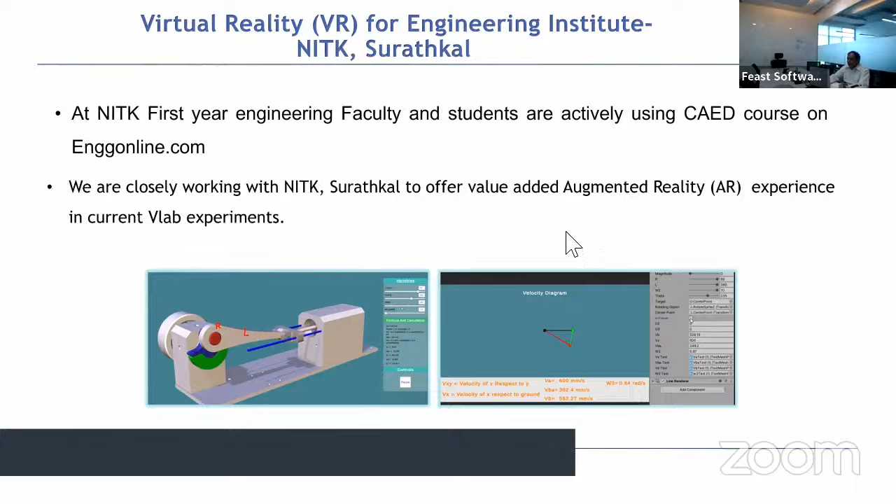So we are working across almost all streams. I can show you applications in mechanical, electrical, welding - welding being one of the offshoots of workshop technology. So from a technological point of view, no stream is a constraint to creating this content.

And we will see what type of content can be created here - like inside a workshop scenario with different tools: lathe machine, grinding operation, fitter operation, 6-cylinder engine assembly and disassembly. Even in mechatronics, complicated processes can be simplified and shown along with the instruments used in our physical lab. Here is an example of scaffolding that has been used. There is no limit to what we can show, but it needs to be optimized and created into VR.

And in industry, I am going to cover the practical installations where it is being done. Like say for example, AFCONS, this is Shapoorji Pallonji Group. So they have installed this for training of their supervisors and workers.

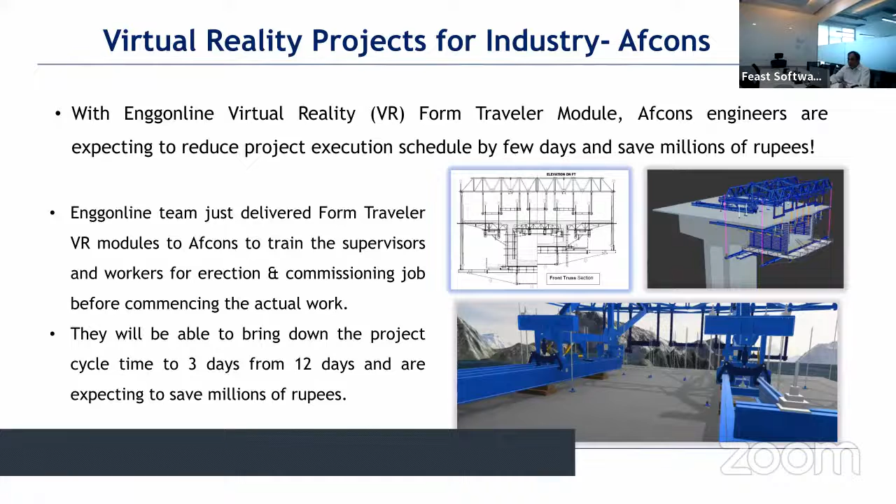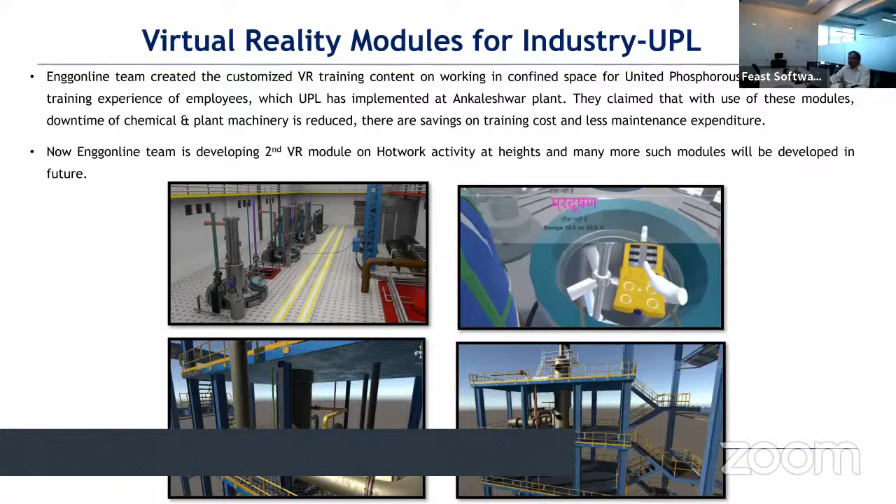And they have benefited a lot from this. Then United Phosphorus, which is one of the biggest agrochemical companies, having 40 plants worldwide, so they have also implemented a few training models in reality. So after showing the academic part in a lab, how industry is going to use it, that I will also demonstrate. But this is, I'm just listing.

For L&T also, we have done a lot of work, and even for L&T's training academy at Madh Island here in Mumbai, whereby all GPs and trainers from various vocational institutes are being trained. So they are using a combination of our engineering online courses, some AR/VR technology, followed by the practicals and the final assessment.

All right, so now I will just stop sharing this screen and try to show you the live demonstration over here. If till this point any of you have any queries or doubts, you can raise a hand or ask me, or otherwise I will continue to the demonstration.

Okay, so I will continue with the demonstration. So I'm going to wear this headset, and whatever I will be seeing, I'm going to share on the screen, which you all will be able to see—myself also what I am doing, and from the other camera what is being seen on the screen. So let me share that.

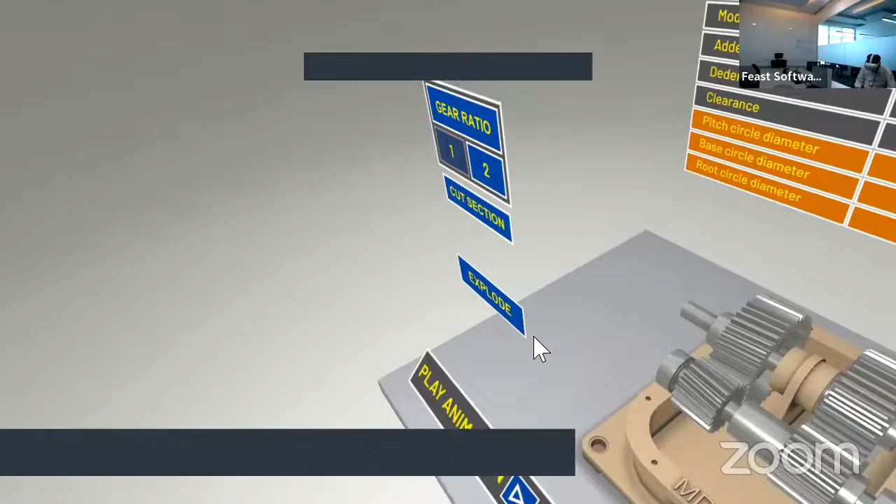Say for example, here I can see the gearbox in front of me with some parameters, and I can play this gearbox animation. Animation means I can just see how this gearbox will be working at different speeds. It may be 1x, 2x, 3x, or 4x.

Now, from the learning aspect, we have included a few parameters, and many other parameters can also be customized and added over here. So I can change the gear ratio. As soon as I change the gear ratio, the length or the size of the gears are changing, and also the related parameters which are being changed. So this can be used from the application point of view also.

And from the design aspect also, certain key design aspects which may be difficult to explain to the students—so those can also be included as a table over here.

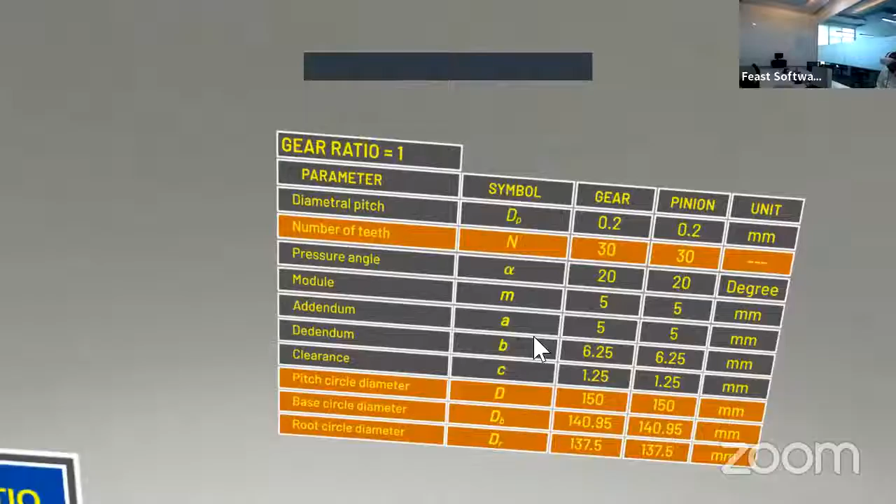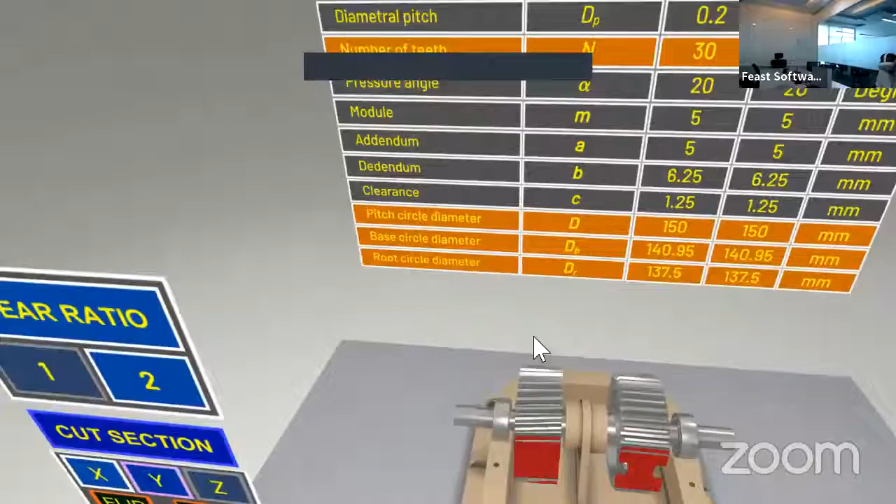Then cut section. So most of the time for first year engineering students, cut sections may be a challenge for them. So in the XYZ axis, I can just add or reduce the cut section and have a look. So this is one of the, what I can say, best applications to see the cut section.

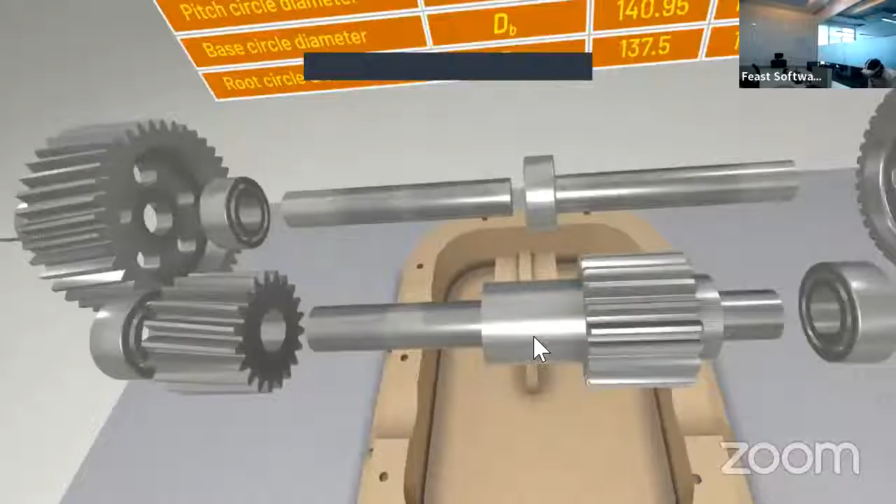We can explode this also. So I can see different parts over here. I can move into any part here, okay, and I can see the inside component. I can assemble it just by clicking on a button.

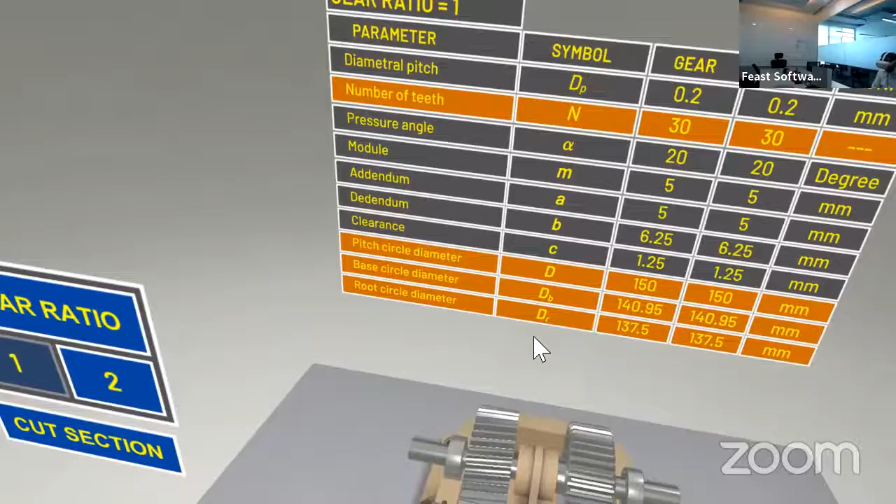So here, whatever the different components are there, I can explain. I can see the cut section. I can even see the nomenclature also with the formulae if required for design aspect—what are the major formulae which are required for design of the gearbox.

Then I can change here some part of gamification whereby there is a spur gear and helical gear. So I can just pick up the component and I can place it. Whether I am placing it correctly or not, that is the gamification part. So this is not correct.

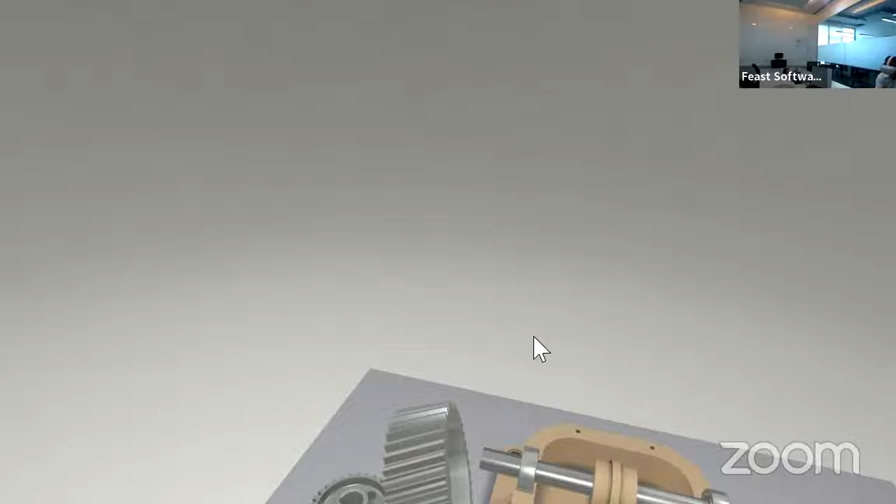Try again. So I have to lift the helical gear and place it in front of the small helical gear. I have to lift the spur gear and place it in front of the spur gear. Then it is correct. So this is a small gamification part.

So like this, we can customize all the models. Let me try another demonstration—let's say for welding.

Sharing the screen. Yes.

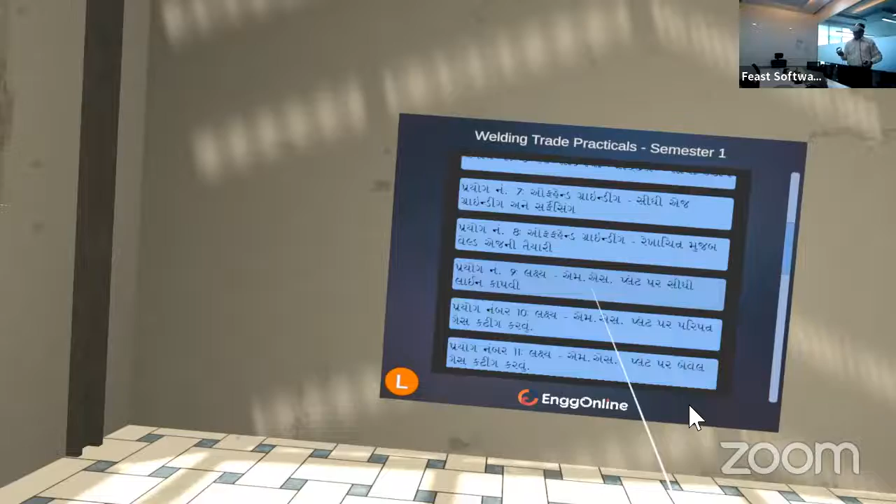This is a workshop setup for welding, and this welding experience can be available in multiple languages, any vernacular language. Right now we have it created in Gujarati and English.

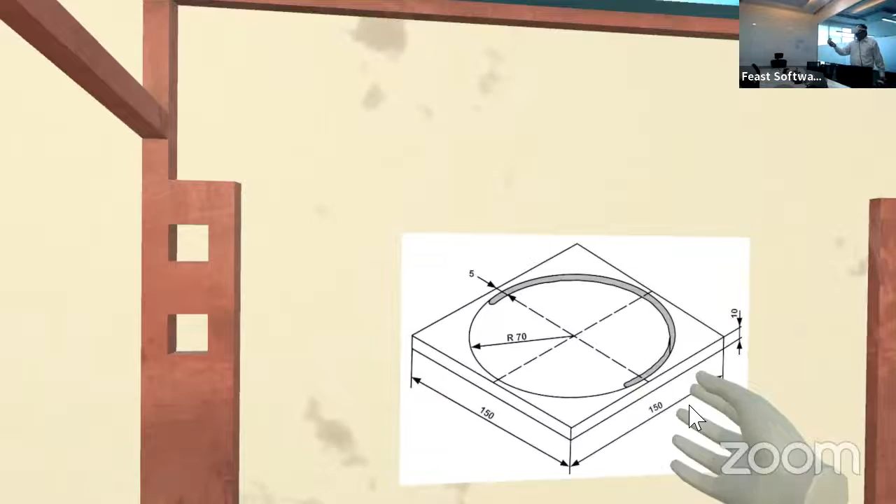Keep raw material ready as per the given drawing and dimensions. This is a totally guided experiment whereby initially the faculty explain in the classroom what I am showing with the help of this lens and projecting it on a projector. Any student can also participate, assume me as a student while the expert or faculty explain the concept and I do it step by step. We are showing the drawing also over here for that experiment, because drawing reading is majorly a difficult part for most engineering students, especially in the first year.

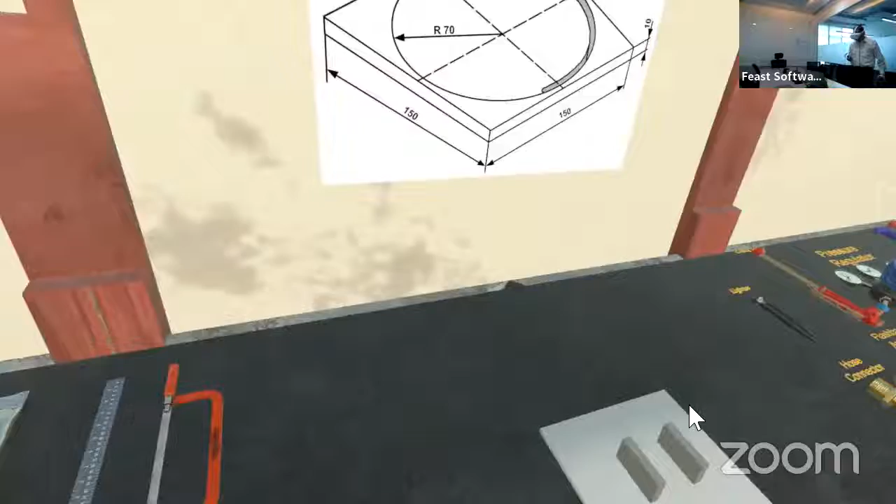Step number 2 is to keep the raw material ready, so I am using these different tools. I can interact with any of these tools, like I can pick them up. The controls are very simple, I am seeing these two controllers as my palms. I can press the middle button and see these palms getting into a fist, and that's how I can pick up any particular component in my hand, and as long as I press this button, that object stays in my hand.

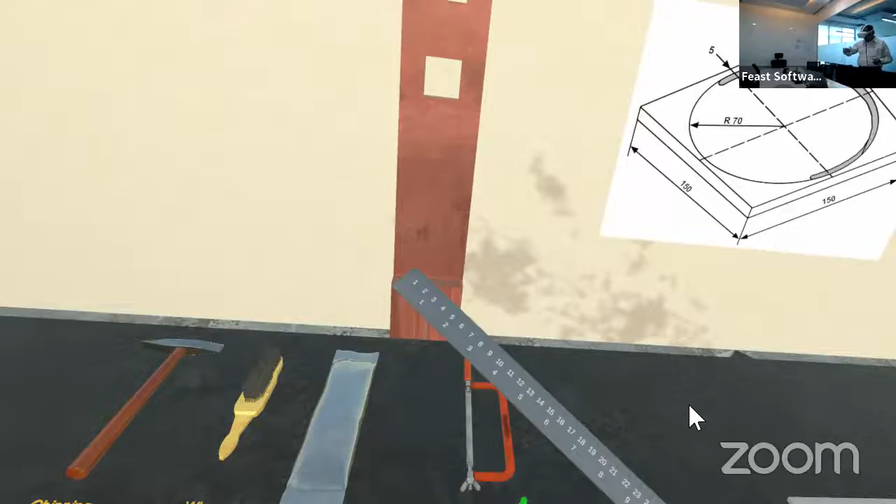As per the drawing, the first step is to draw a circle with radius 70, and the dimensions are given, like 150mm by 10mm. There is a foot scale also available, and all the dimensions will be as per the real world. Even if I try to measure the dimensions, it will be almost the same as physically.

Keep the job on the cutting table in a flat position. I have to keep the job in a flat position on the cutting table, clean the job surface with a wire brush, and remove burrs by filing. So now I have to clean the job surface.

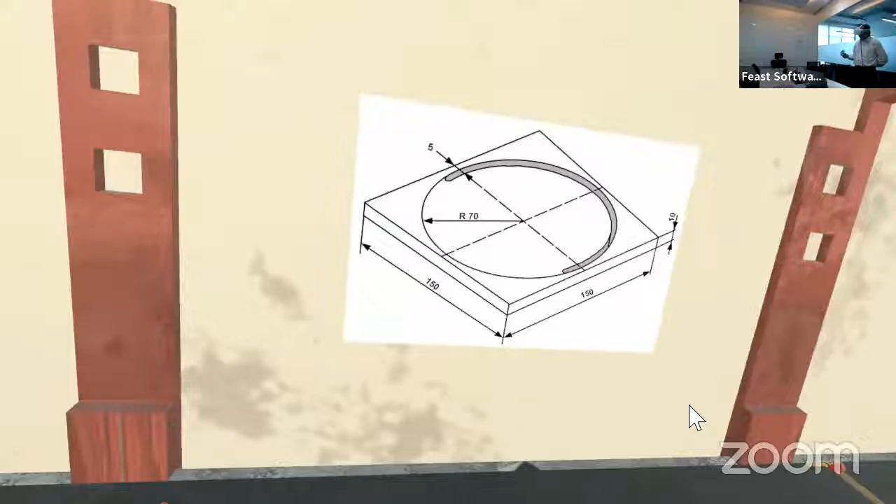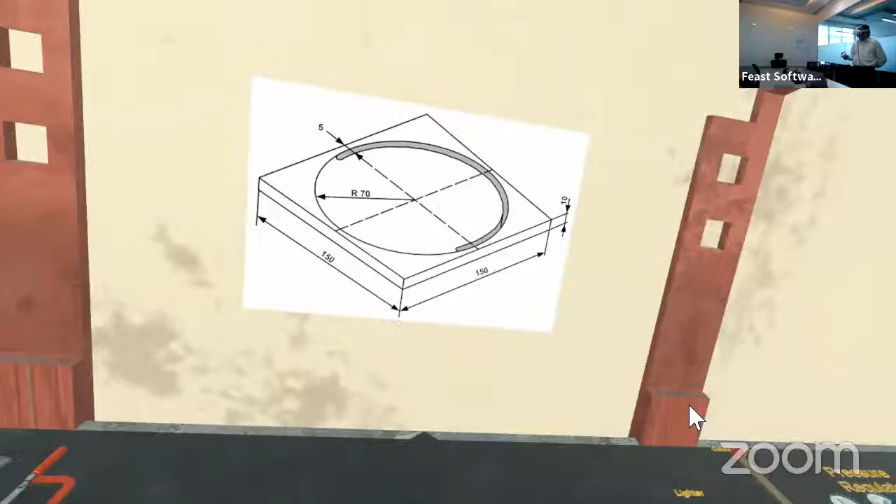If I don't clean the job surface and try to do other activities like welding or cutting, what are the disadvantages? That needs to be explained by the faculty or the expert. Most of the time in our workshop, we have this setup ready, like the gas cylinders and different accessories, and we tell students to do the end activity, different types of welding or cutting, but we don't give them a chance in reality to do this setup physically. That's the gap - when they go into industry, they might not be aware about the different setups or the basics they were supposed to learn in lab activity.

So this is for welding, but it may be applicable to any other practical.

As per the drawing, the surfaces of the job should be marked and punched. So the next step is to mark the job with the help of a center punch and hammer. Whatever position I see in fluorescent green color is the guiding position, so I have to put my center punch aligning to that position and hammer it. But if I try to hammer it just by touching it, I get a sound, but the impression is not marked on the job. Why? Because we are trying to get the feeling or forces which we may apply in reality - unless I hit it with the right force, it will not get punched.

So I have to perform the action, even though I am not holding these tools practically, but I feel like I am having this hammer and applying the force necessary in a real condition.

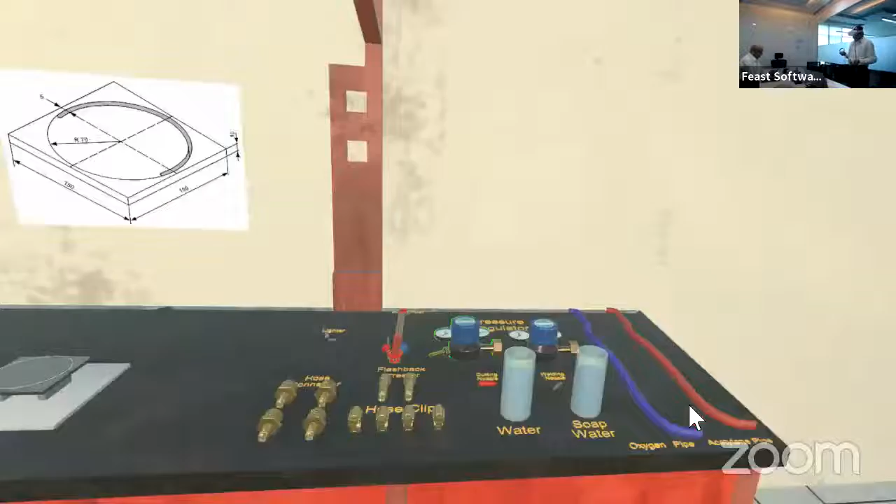Fix regulators on both the cylinders. Fit the regulator - for the right-handed thread run clockwise, and for the left-handed thread run counterclockwise. So the different nuances here: one type of regulator, like on oxygen or acetylene, has clockwise thread, the other has anti-clockwise thread, and we have to know how to fit it correctly. This is something students may not be aware of if they don't do it themselves, so certain parts can be done virtually.

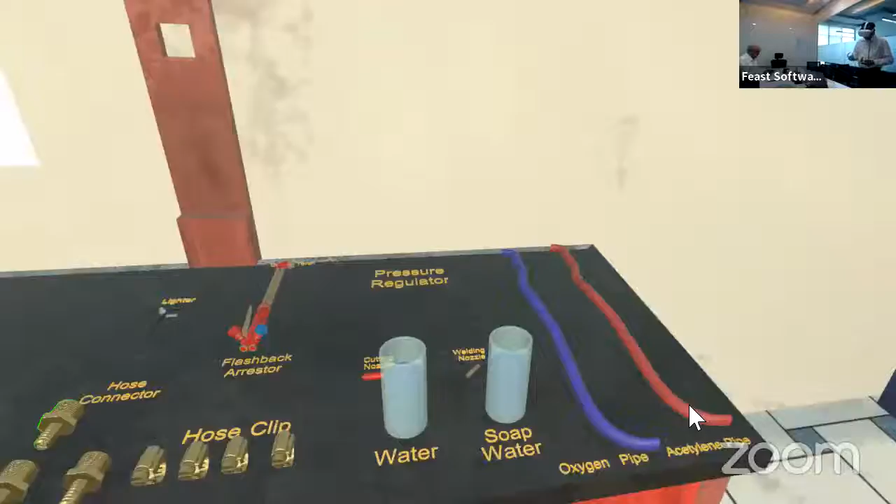Fix flashback arrestor and hose connector on both the regulators. Setting up cylinders may be a hazardous activity in real life, so this practical is done in workshop. Things which are really needed, like welding and cutting angle, can be done practically also after practicing in VR.

The next step is fixing the hose. These are the hose pipes having different colors, so I can attach it to the regulator.

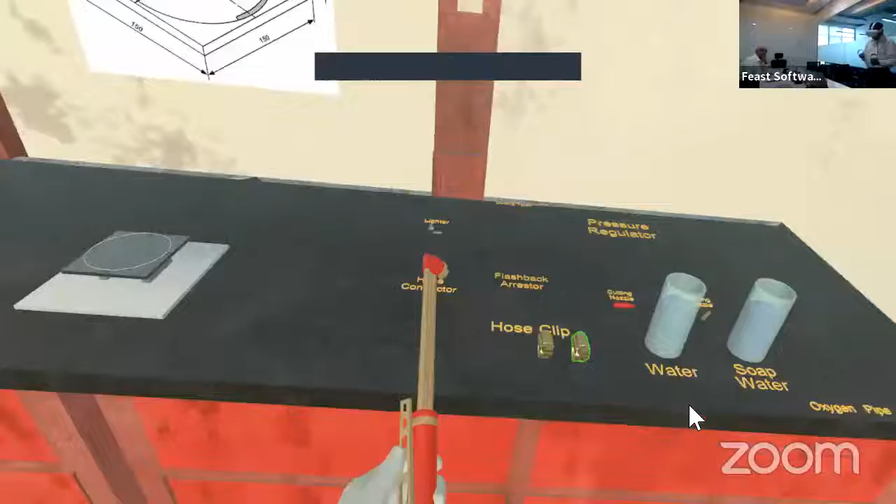Fix hose clip to avoid leakage of gas at regulators. To prevent leakage, I have to put the hose clips on both pipes. For the hose connector, fix hose pipe and hose clip - now this is on a welding torch or gas cutting torch, and I have attached the hose connector so I can attach the hose over here. Again, to prevent leakage, I fix the hose pipe on both regulators.

Now I can set up the gas pressure. I can see the readings on the knob. Through this zoom call you may not be able to see it clearly, but once you near the lens, you'll be able to see all the readings there.

Now we have to check the leakage also, and there are two aspects - one is the oxygen cylinder, one is the acetylene cylinder. For acetylene, we have to check it with soap water - whether normal water or soap water. If any bubbles appear, then our settings are not okay, they're incorrect. If bubbles are not there, then this is perfect.

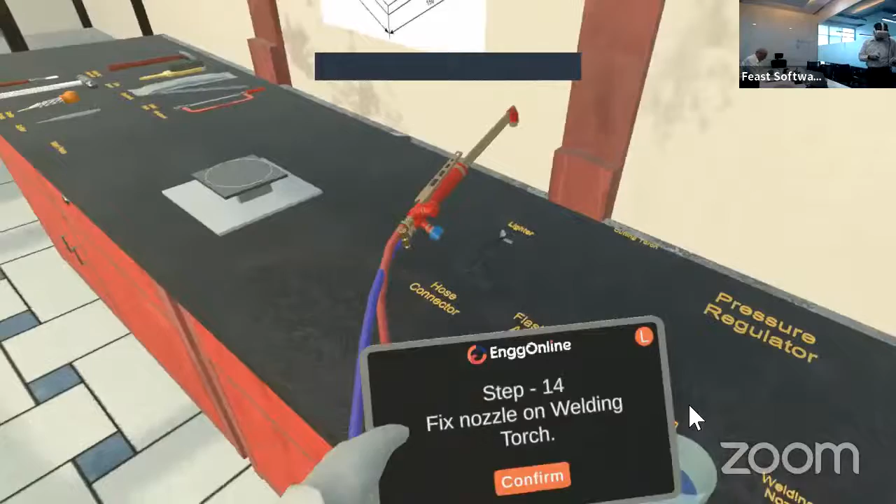Again, with the help of water, we can check the oxygen regulator. No bubbles - so this is a perfect setting. Now on this torch, we have to fix the cutting attachment.

Open acetylene control valve about 1/4 and light the flame with a spark lighter. Since we have attached the hose from the oxygen and acetylene cylinders, first we have to open 1/4 of the valve from acetylene.

Check leakage if any, then fix nozzle on the welding torch. Here on the welding plate, there is a guiding point also, to be taken as the dot here.

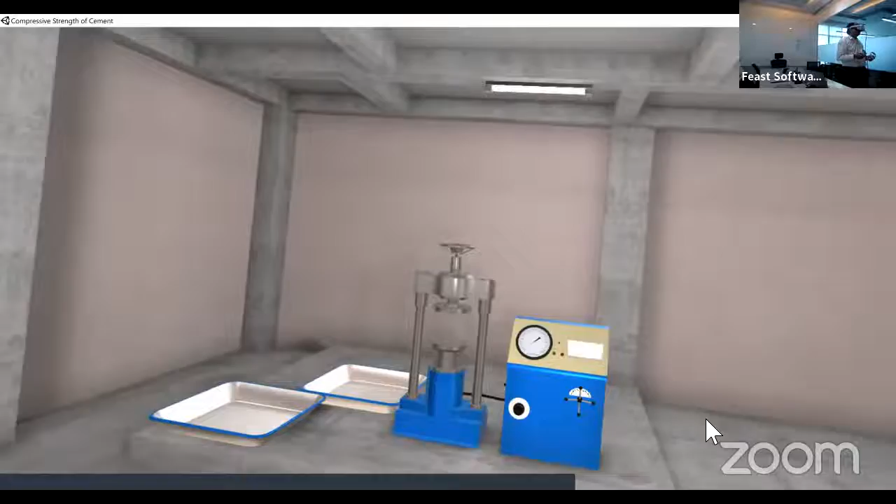So this is the compressive testing lab. All equipments are there in this lab.

So in this corner table, instead of iPad, I can have an arrangement to read the instructions on the wall itself in bigger text. I can wear this and check all the apparatus required on the table. So I can check the apparatus.

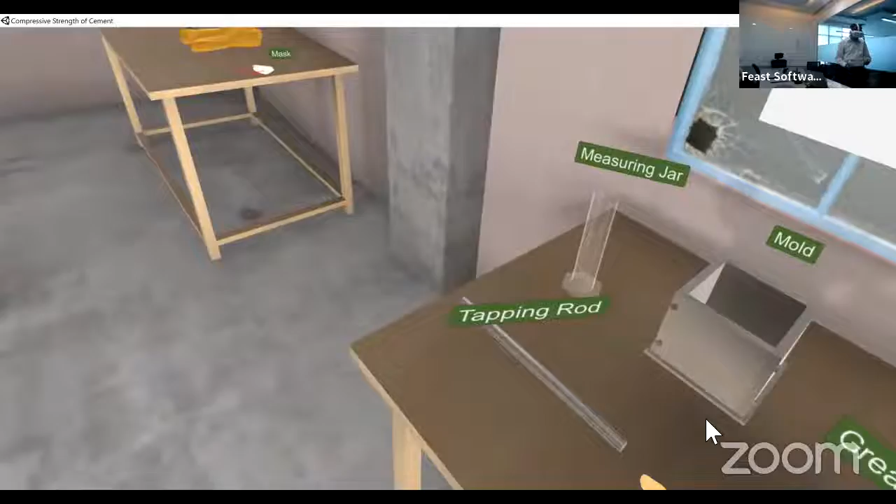Prepare the required number of cube molds for the experiment. Pick up the highlighted plate and place it on the highlighted place. I can pick up the plates.

Now, pick up the screws and place them in the highlighted place. Now, tighten the screws using a spanner or wrench. I can tighten it up.

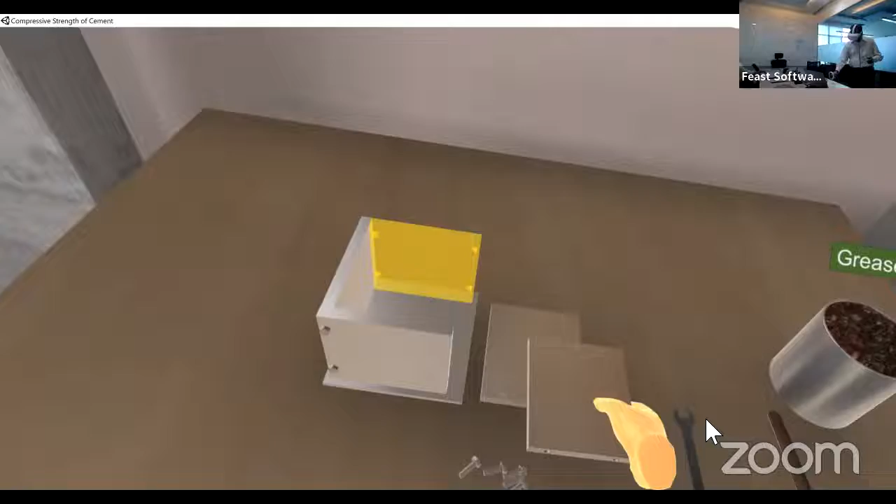Similarly, place the rest of the plates and screws, using a spanner or wrench to tighten them one by one. So here, the practical steps we are going to do to set up this mold, I am doing virtually, but I am getting the same feeling as what I will be doing practically.

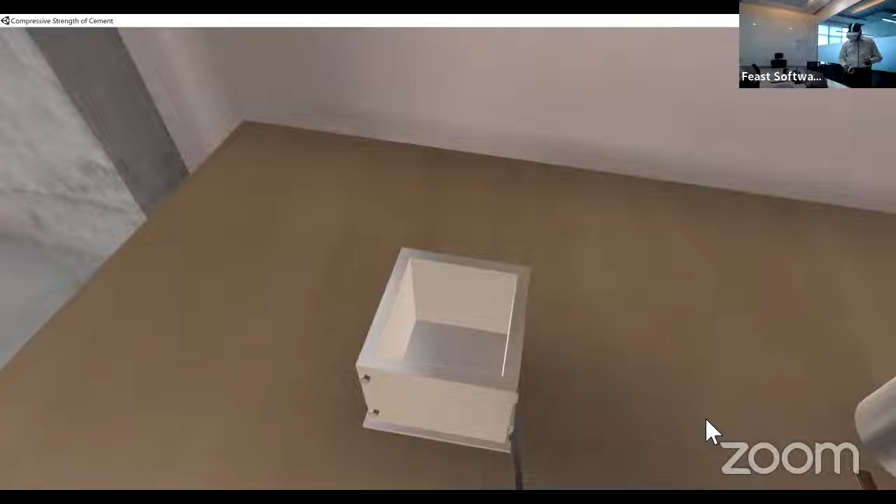So these screws have been tightened up once I apply the spanner over here. So here, some of the actions we have kept as animation - pick the brush and, using it, apply the grease inside of the mold. I can pick up the brush, the grease, and apply.

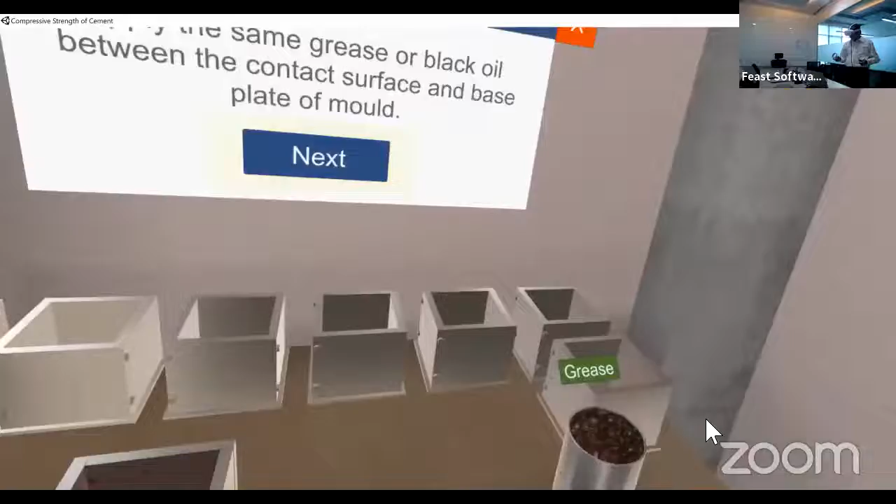Now click on the next button. So here what is happening, I have done the process for setting up one mold, but similarly for testing as a compression testing experiment, I need to have multiple bricks or molds. So here we are trying to reduce that time by doing one activity and multiplying it or showing it in multiple boxes.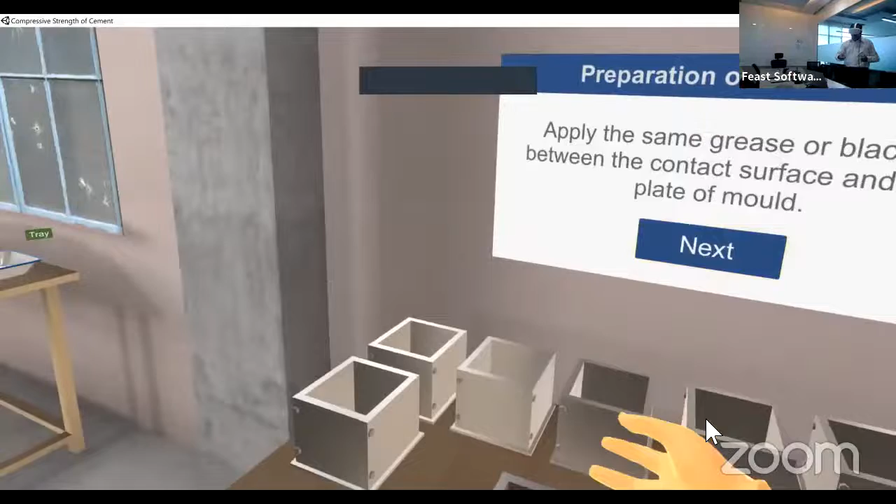So that is enough experience. Collect and weigh the materials required for each cube separately. Now these are the pick materials. Take the grade 1 sand by trowel and drop it on the weighing machine.

Now pick the weighing machine tray and drop the sand on the second tray. Similarly, repeat the step of grade 1 sand for grade 2 and grade 3 sand. So here, whatever the instructions are there, accordingly I am conducting this.

Grade 3. Now, using a trowel, pick the cement from the cement bag and drop it on the weighing machine tray. So this is cement. Now, pick up the weighing machine tray and drop the cement on the second tray.

Now, dry mix the mixture using a trowel. The mixing time of dry mix should not be more than 1 minute. So here I am mixing the cement. After mixing it...

Now, add the water in 1/3 quantity of the total required water. I can see the quantity of water over here also. I am pouring the water.

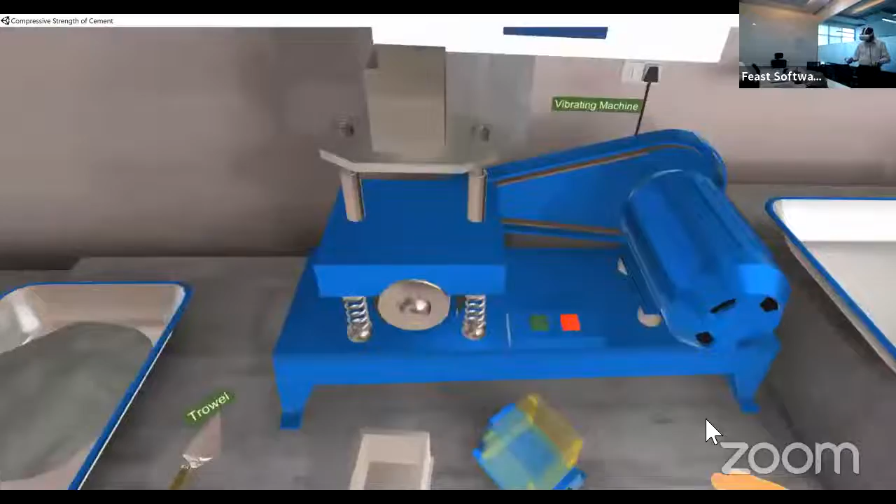Pick up the cube mold and place it in the highlighted place. So here I will go a little bit backward because this is in 1:1 scale, so whatever is placed on the ground, I have to really bend and get it done. So I'm placing this box.

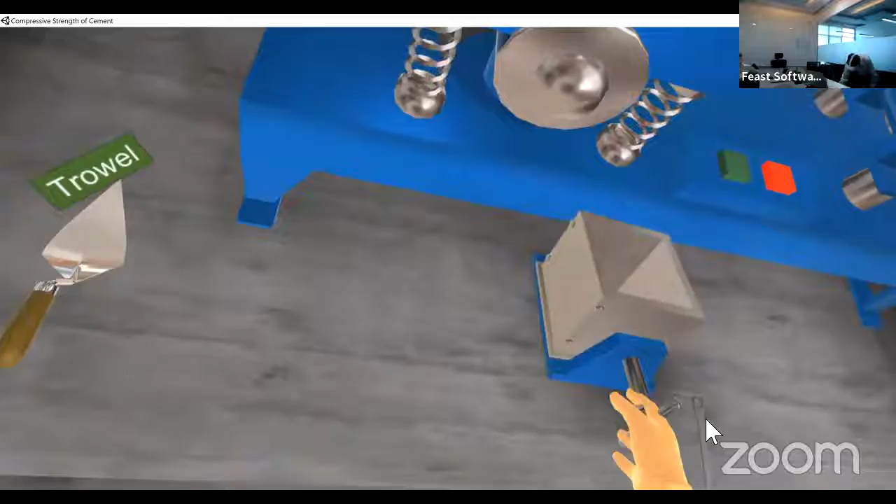Now, tighten the highlighted lock of the mold. Pick the mold assembly and place it on the vibrating machine at the highlighted position. Now tighten the highlighted screws of the vibrating machine by hand.

I'm tightening it. Using a trowel, pick the cement mortar paste from the tray and place it in the highlighted mold, 2 times. Now hold the tamping rod and tap the mortar paste.

Similarly, again insert the mortar paste and tap it. Do this 2 times. So as per instruction, I'm just following the steps.

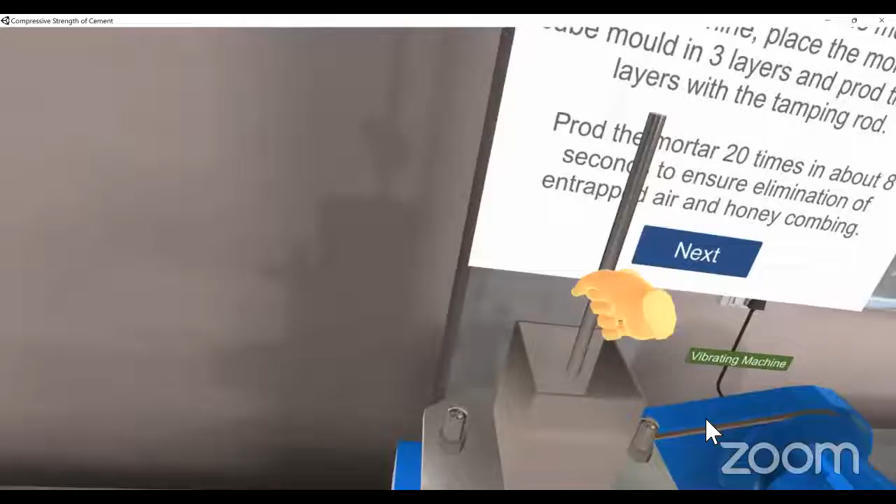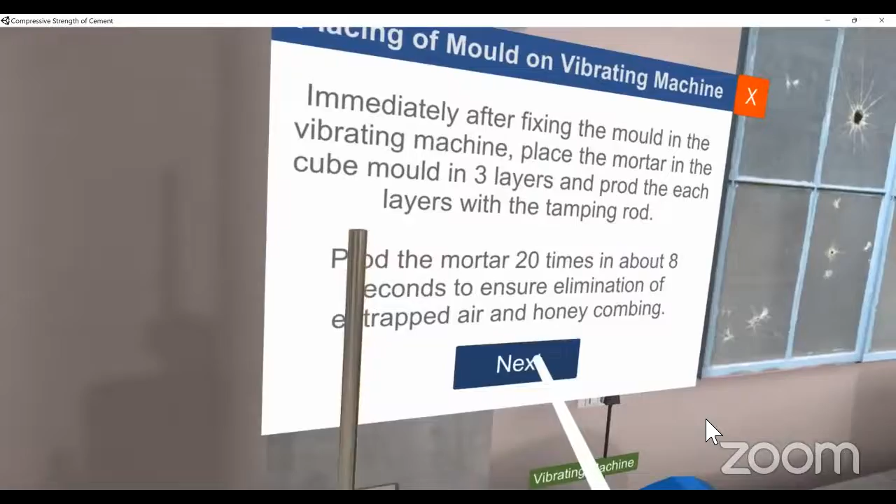Now, place all the cubes in the water tank for water curing. So here I am putting the cubes in a water tank for curing. Okay, now the next step.

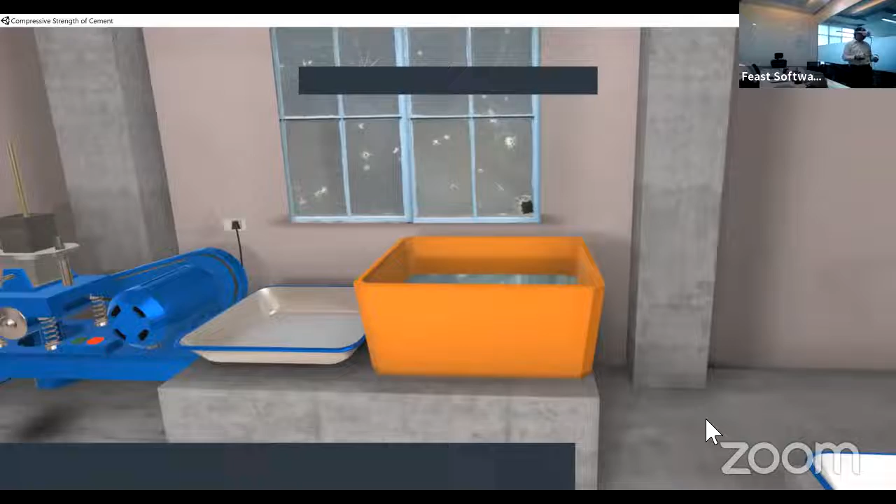Take out the 3 cubes from the water tank for 3 days of testing. So we assume that 3 days have passed, and now we are taking the cube. So 3 different cubes I am taking out.

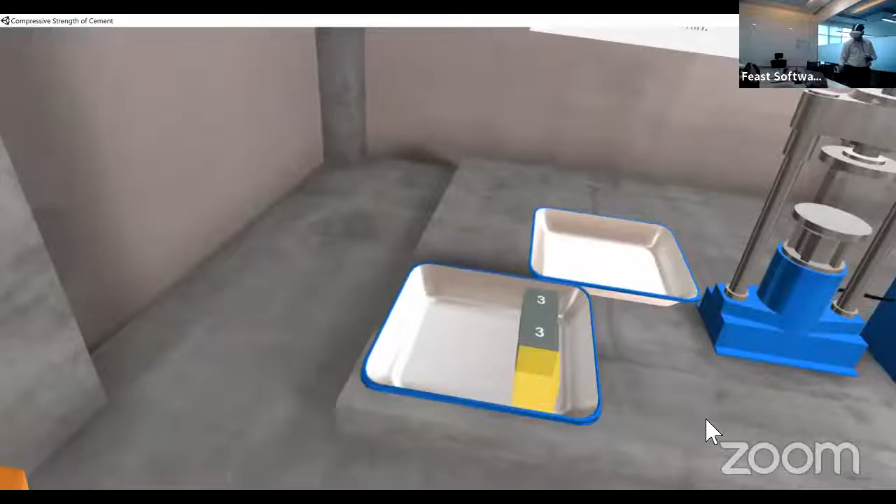Leave the cube for air drying for 1 hour before testing in CTM. So practically, the setting time and soaking time, which normally take a longer duration, can be simulated quickly over here, and we can conduct the experiment. We have already put in the probable outputs over here.

Sorry, so I have come out of that experiment.

So like this, we can build lab experiments for civil, electrical, mechanical, or any other stream, wherever we have actual lab setups that can be mimicked into a VR setup. Or in cases where day by day the technology is advancing and the new setups may be costly, or industrial scenarios where we are not able to go and show it to students or let them experience that, those can be really built into VR. So we are saying the setups which may not be possible to upgrade or bring into the labs or classroom can be created into VR, and the rest of the practice students must do in the lab.

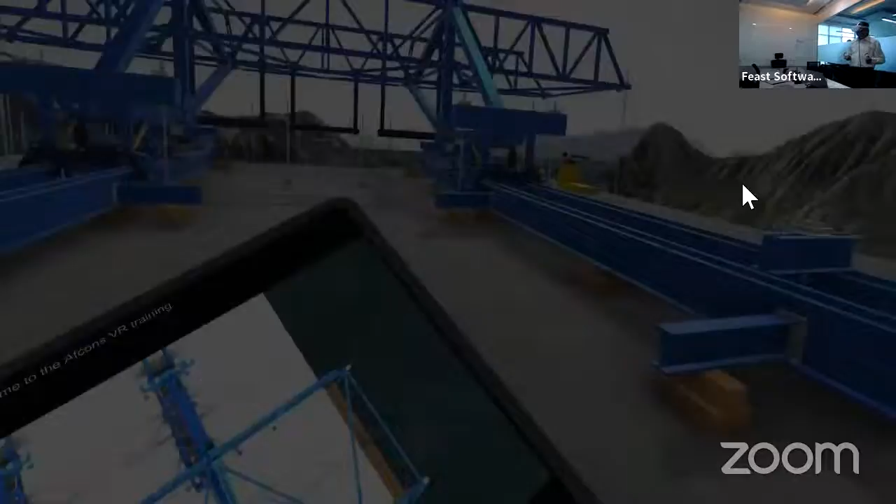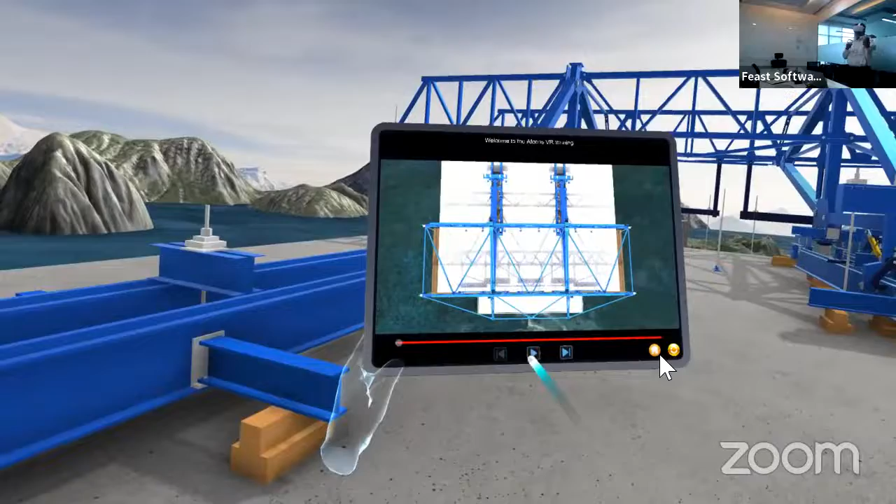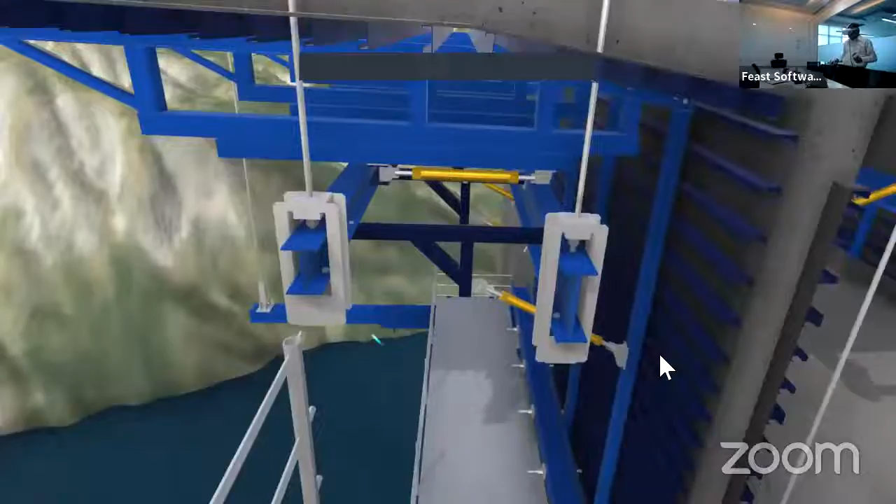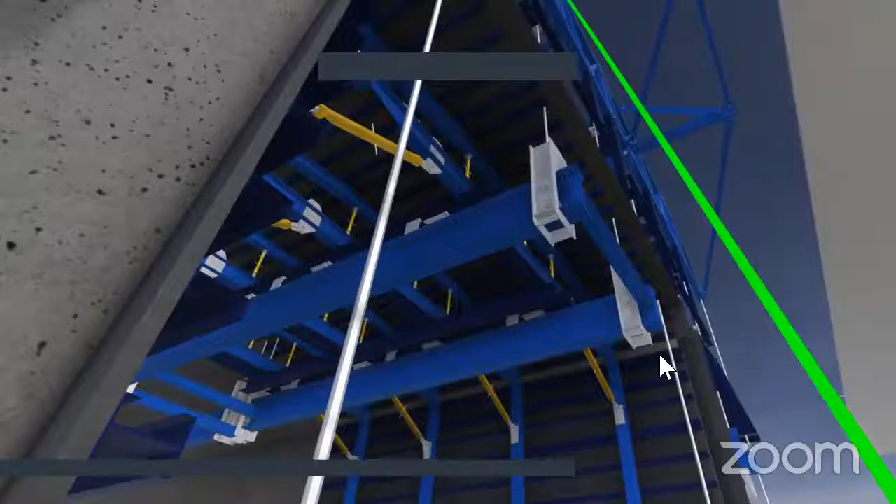So this is the environment what we have created. The experiment is getting loaded. So there is an express highway, Mumbai-Nagpur, which... this was the scenario which has been created for AFCONs, whereby the initial case was they had to train their workers or supervisors after the erection was done at the site.

But because of this training model, they were able to train their workers beforehand, before erection was happening, and they reduced their cycle time from 19 days of construction of one girder to 12 days. And the workforce required was also reduced from 50 to around 35 to 40. So there is tremendous cost saving in multi-crore projects. This is a practical application.

And like this, I have many other applications. So maybe instead of showing a particular demonstration, I have some recorded videos which I can share. Maybe I will show a couple of videos, and then we can proceed for the question and answer session. Yes.

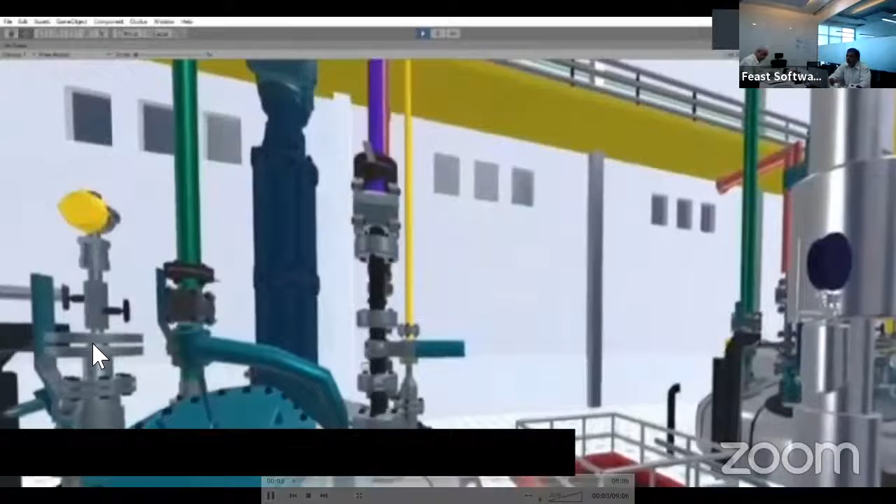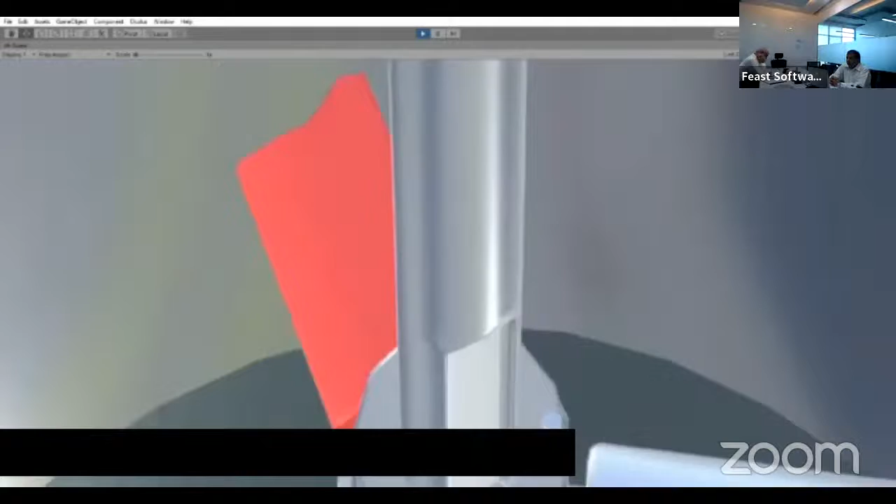So like what I showed in the slide, United Phosphorus Limited, which is one of the fourth largest agrochemical companies - at one of their plants in Gujarat, they were having training issues for working in a confined space in a chemical reactor. So here the situation was, you can see a chemical reactor and agitator shaft.

So one of the blades has been broken, and now the scenario is, along with safety precautions, we have to replace that blade. Generally, to replace this blade, as a layman, we can think of maybe 4-5 steps - the worker can go inside that particular confined space with the tools, remove the blade, replace it with the new one, and come out. Only these steps we can imagine.

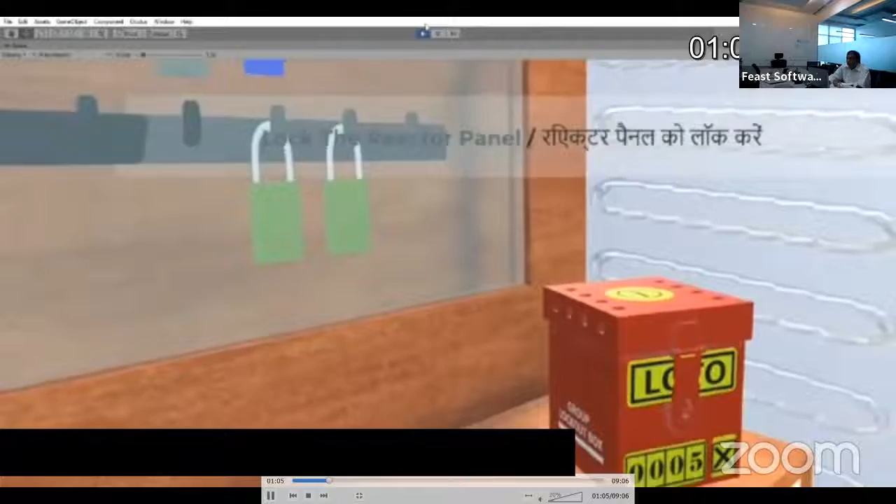But if we see the standard operating procedures of that particular industry, especially a chemical one - here you may not be able to see clearly the forms - it will start with the permit form selection, like which is the correct one. The actual forms which are being used in industry are being shown over here. Then the reactor is switched off and it is locked so that another person cannot accidentally come and start that reactor.

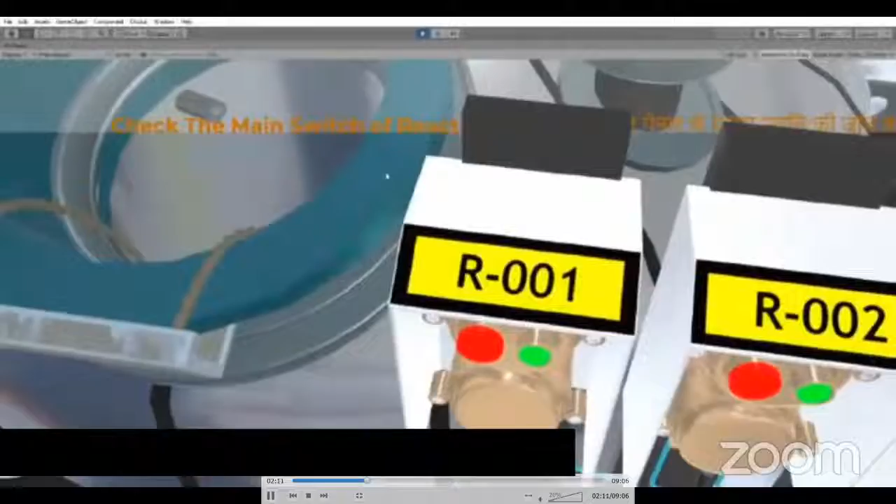And the key of that lock is put into the login tag, lockout tagout box, logbox, which is again signed by the user officer and locked. Then after that, the worker will go to the actual place. He will again check whether it is really switched off or not, that particular reactor.

Then next, the blinding of the chemical pipeline - blinding can be done with the help of plates. In case of nitrogen, it should be totally removed because there were many accidents which happened due to excess quantity of nitrogen in the confined space, and there were many deaths in the field. So after this, we clean the reactor.

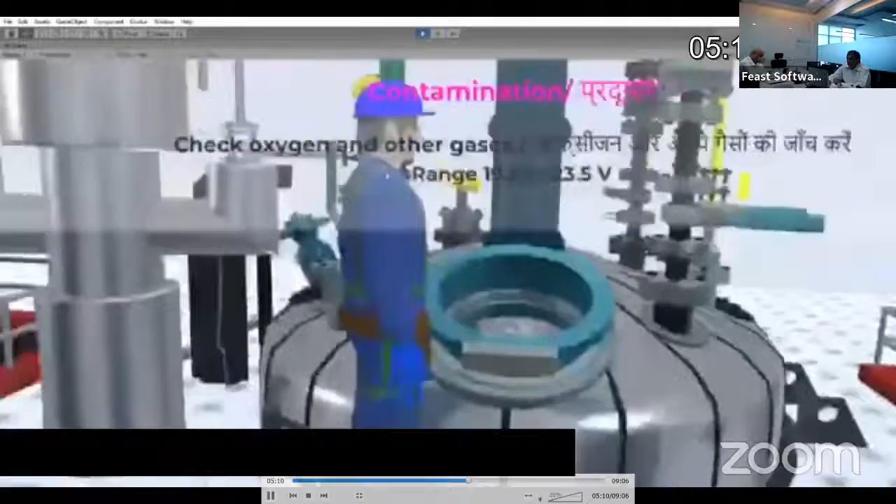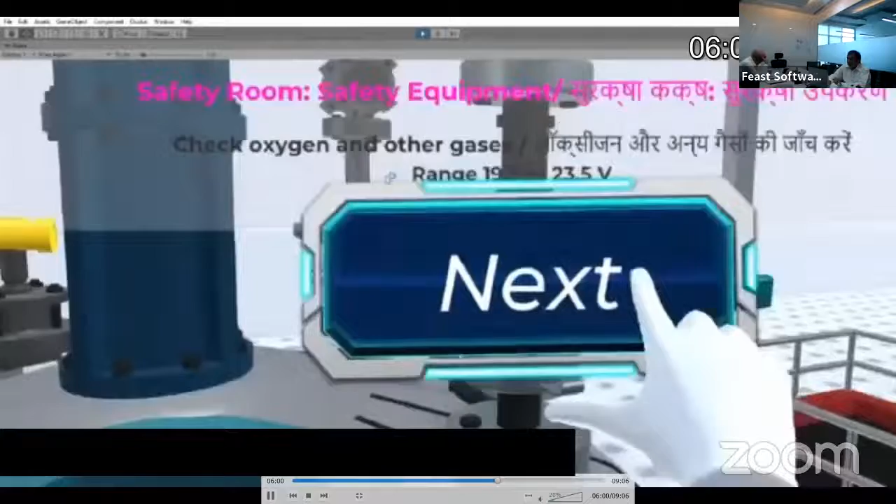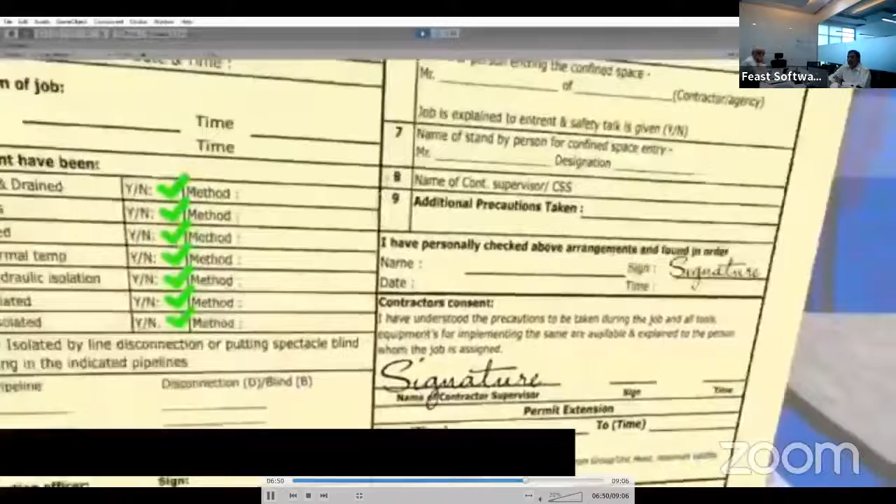Then physical inspection, whether any gas fumes are there - if gas fumes are there, we have to clean it with the help of a jet of water. Then we have to check the gas level with the help of a gas level meter. Unless those are in an acceptable or safe level, we cannot enter. Before entering, we have to again wear the PPE kit, wear the bubble hood for oxygen supply, sign a final permit form, and enter into the confined space reactor.

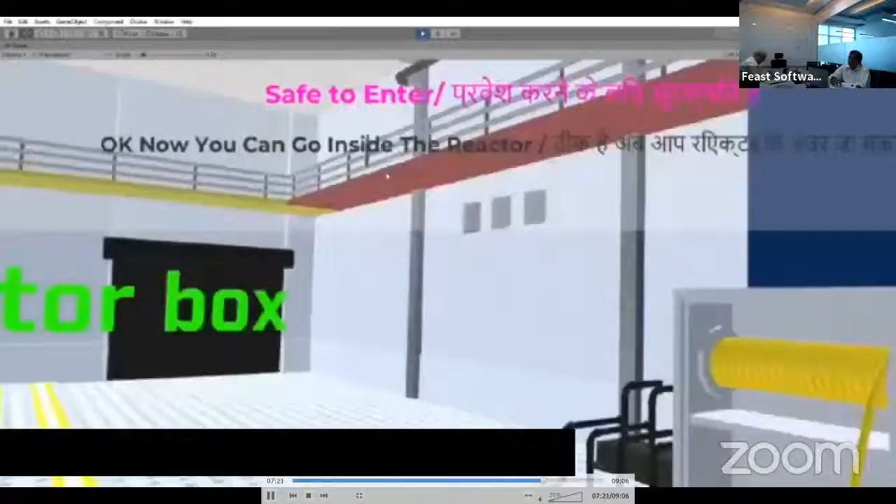But here they have given one situation - in case of emergency, if the alarm goes off, the worker has to leave their current work aside and go to the refuge area outside, wherever it is nearby. So that is also one of the scenarios which we created. After this, the worker changes the blade and comes out.

So this is the total training module what we have created for UPL, United Phosphorus Limited. Similarly, there are many other modules where we are working with the industry.

And for some institutes, what we have seen in Rajkot side, where there is small industry across, the institute themselves, their faculty, with the help of some outside experts, they are trying to get the projects from the industry and execute in the environment what they have in the college. So they are even one step ahead in how to use the college infrastructure for industrial consultancy.

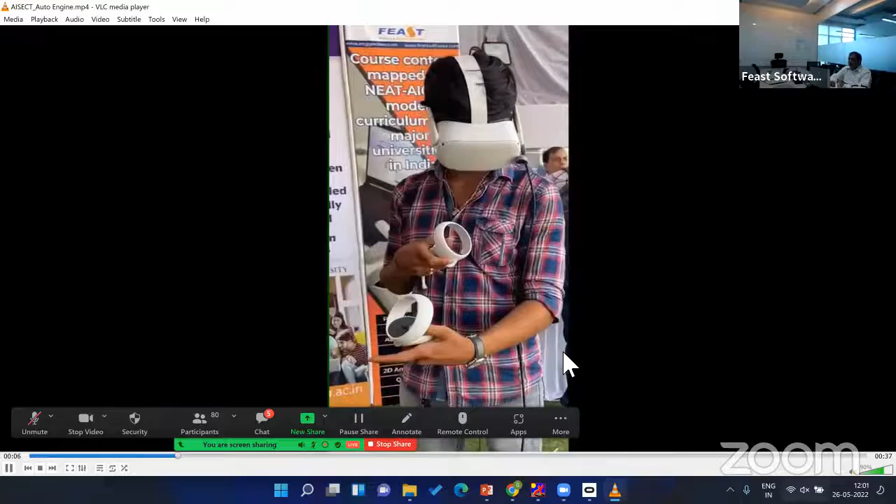Now at one of the events in Bhopal, the task was complete disassembly of the engine. He was so interested that he completed it in about 15-20 minutes to half an hour, a disassembly of the engine with more than 100 steps. So this particular person.

So this is the disassembly what we were doing. And again later on, out of interest, he performed a few industrial models also. Very efficient.

So if you see, there is a lot of excitement among the faculty and the students across India, wherever we have gone, and many institutes where we have implemented this as well.

So for example, this is a faculty at Don Bosco ITI in Mumbai. They are teaching with the help of this AR/VR pedagogy.

The institutes or faculty who are using this tell us on their own that after using it, first of all, they were able to complete that particular concept explanation within the stipulated time. Due to immersive experience, some students who were not giving that much attention to the experiment or topic suddenly changed their view and became very interested to perform the practical. It gave the required, expected output from that student. So I will show you a few other videos also, like how this has been implemented.

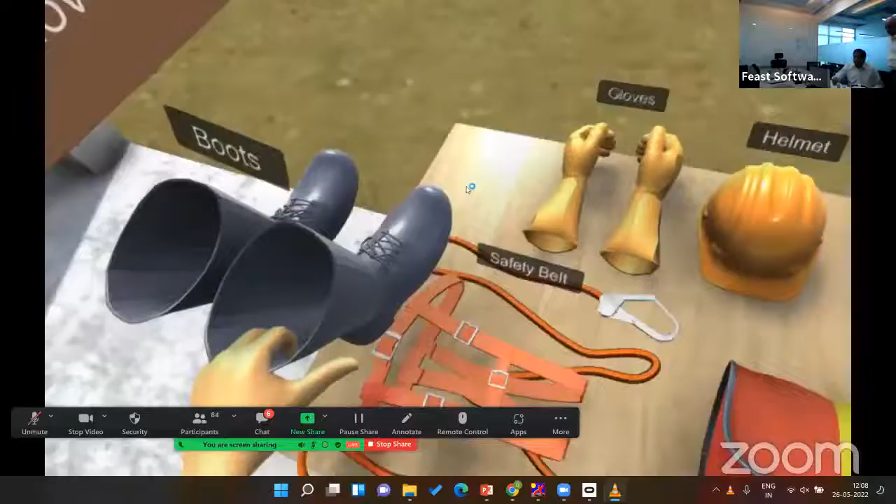So one more video I would like to show you about, say, most of you have seen the mason setting up a wall and all this thing. But as a civil engineer, how many of the students are actually doing it, except learning it only theoretically in a classroom or seeing it as a video?

So here we have created this setup for different types of bonds, like T bond, L bond, Flemish bond, to set up a wall. First of all, the user has to select the right tools for that particular job. The spirit level means there will be a level as per the current angle I am holding, so all physics has been implemented over here. That's how it is giving us 99% reality, even though we are in the virtual world.

Now the first step is soaking of bricks for say 12 hours. Again, we have to see the bricks, whether those are broken or intact, so we have to select the bricks. These are the small points which we can practice here itself in a classroom or lab, without investing into material.

The next step is to get the sand and the cement in a particular ratio, say for example 5:1.

In the previous experiment, I showed the compression test where we take sand in a particular proportion, mix with cement using a trowel, and pour water. We are trying to keep the difficult aspects from our coding point of view, like showing the water and the texture of the sand grains or cement. This is very difficult and very heavy in terms of processing for our graphics card.

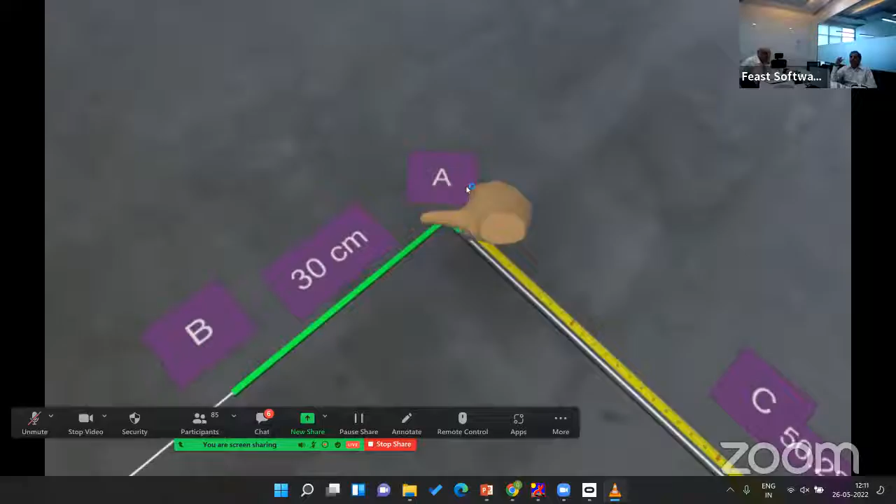The next step is to do the marking. Here literally the user has to sit on the floor and do the marking. It is not like I'm sitting in a chair or standing at one position while doing this practical. It is 1:1 scale. So practically what the workman does, we have to perform even while wearing this virtual headset. That's the beauty of it. It gives you around 99% reality.

Along with other effects we have, practically what we do is place the bricks at two ends, tie a rope, then place the brick again. For this type of bond, we need certain bricks made into halves - we have to do a half section of the brick. Now, how to place it to make the T bond? That is the practical aspect we are going to demonstrate.

First step, we have to place the mortar on the ground, then place a brick on that. Here's how we are trying to optimize the time and processing power of this experiment - whatever the minimum steps or necessary know-how technically for that particular step, only that we are doing the first time.

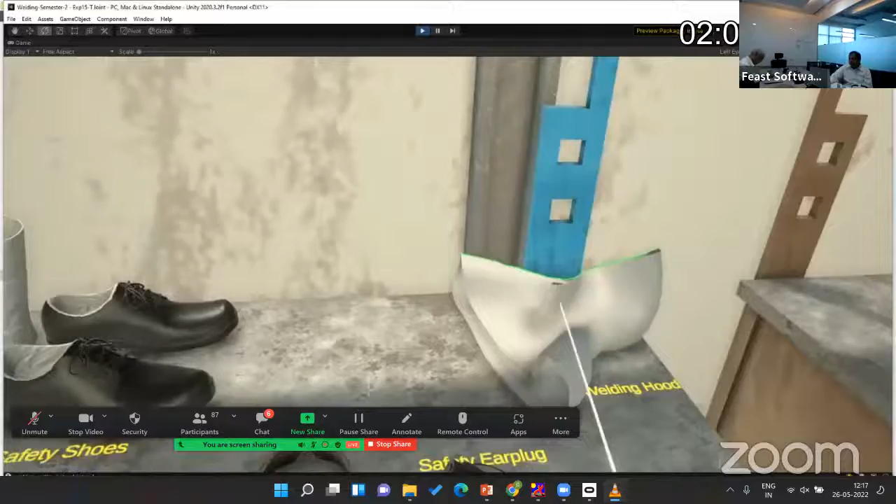Now we have on that gas. Here on a bench vise, we have to fix the job, that plate. Take a cut, as per our marking. So again, the rate of cut, the rate of the distance between that - that will matter.

So now we have to file that. Again, which type of file - flat file, round file, half round - needs to be selected, and how to hold that file in two hands, so that it should be a perpendicular filing action. It should not be tilted at any angle, forward or backward. So all these minor details we have tried to cover.

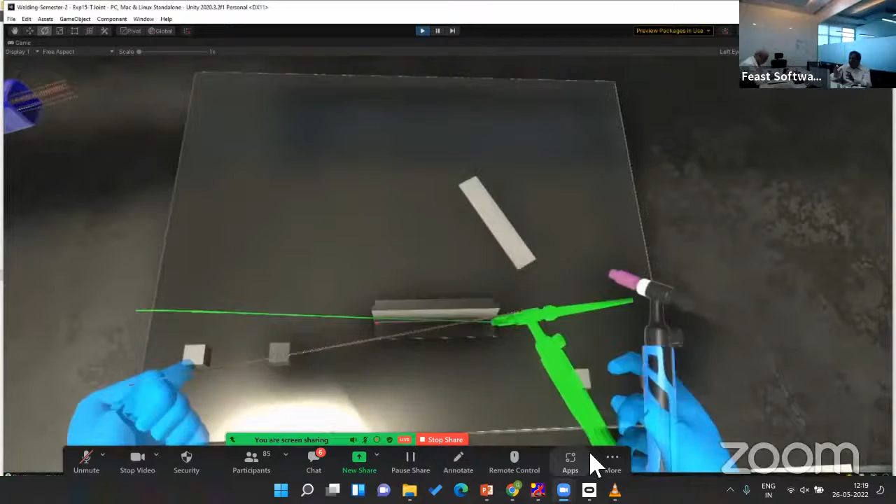These are the small things which are really necessary for a student to understand. And if you see over here in the red label, if something is wrong - like the angle is wrong, the speed is wrong, or the position is wrong - then immediately there will be an indication that this particular parameter is wrong. So there is a chance for the user to make a mistake and learn from their own mistake while doing this practical.

And again, there will be no material wastage, no hazard - it will be within this time, and all effects will be as per actual.

So here next thing is again the adjustment of this pressure regulator cylinder. And now we have achieved the level - most institutes are opting for physical welding simulators, which cost around 15 to 25 lakhs.

So what does a welding simulator do? AR based or VR based welding simulators have a physical welding gun with you, and the student does it on a job - that means there will be a plastic plate, but by wearing an AR headset, VR headset, or screen, we'll be able to see the flame. And it gives output only for a limited number of scenarios, say 10 to 15, for only a couple of types of welding like GMAW or TIG.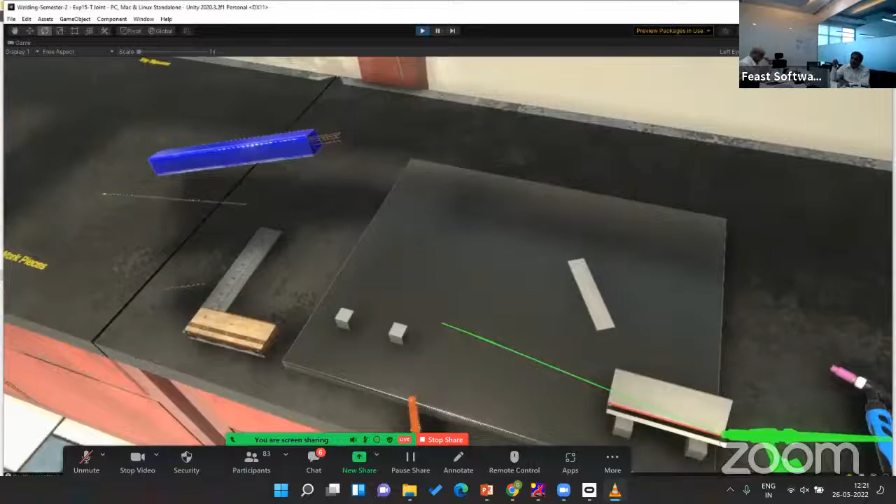So the same thing we have applied in our virtual reality, whereby you need not spend that 25 lakhs and above for only one setup, which is very stationary with limited operations, where only 2-3 parameters are being measured. So all these things can be done in our virtual reality headset.

The latest development in the last week is that we can see all 3 parameters over here - your angle, your travel speed, and your distance. And according to that, if you see the job horizontally at the level of your eye, you will be able to see the depositions, whether it is less or excess.

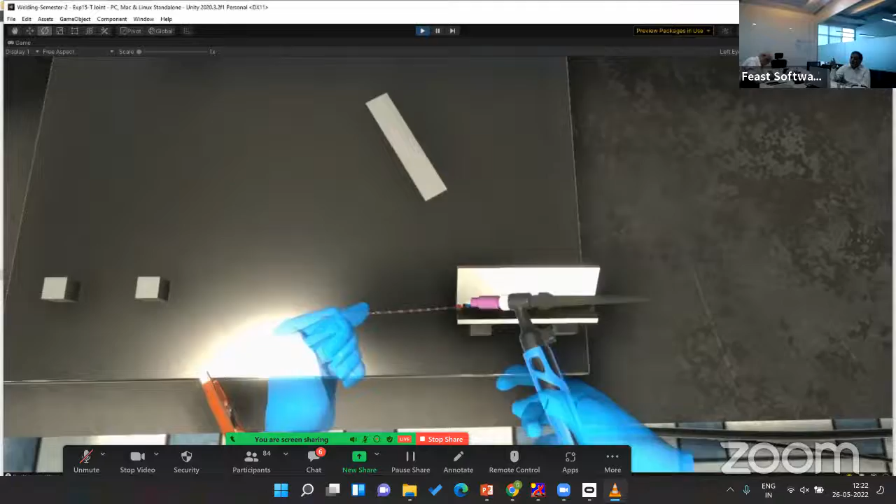Wherever the speed is not correct, it is either burnt or shown in yellow color. So like physical welding, you can see all these things. So you will not need to go for the welding simulator only for this kind of thing. And in one device, you can include multiple trades also, like mechanical, civil, electrical.

So this is a very high-end technology with very affordable initial cost and running cost as well. That's what I can say from my experience with customers who have already got this particular setup in their respective colleges.

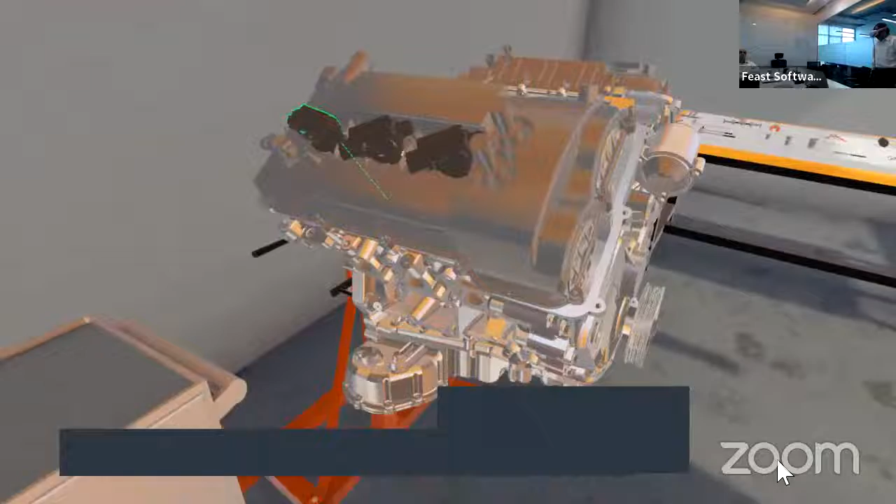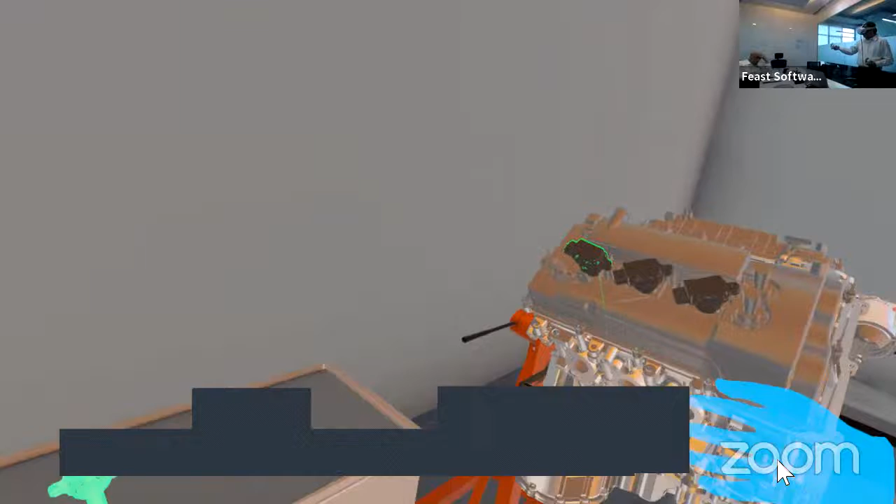So I will take out the igniter coil one by one. Coil number 1, I can put it at the highlighted place on the table. Coil number 2. Igniter coil number 3. Once I have placed that on this table, it will automatically go to the other table to save time, because the ultimate learning outcome is how to remove this coil and place it at the appropriate place, which will ultimately be placed on a larger table.

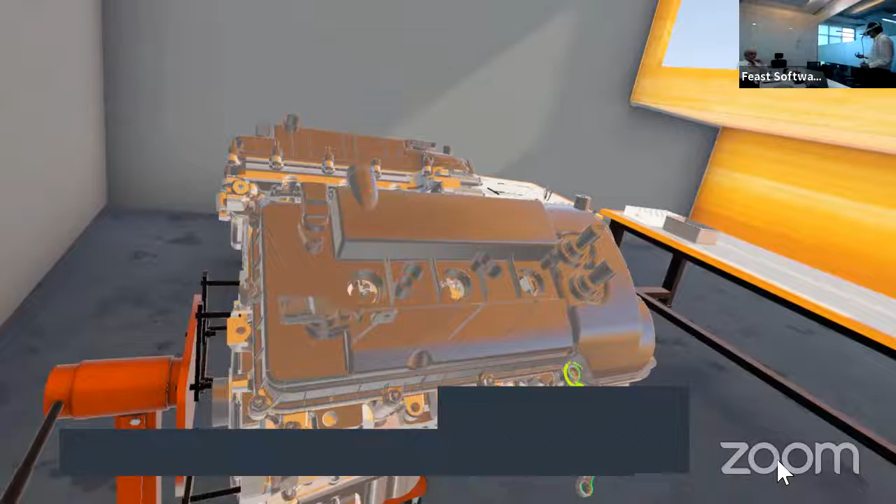Next step is to remove the tappet screw. So here I have to take a 10 mm ring spanner, rotate it 6 times, take it out, and I can see a bolt over here. So I have to take it down in the box.

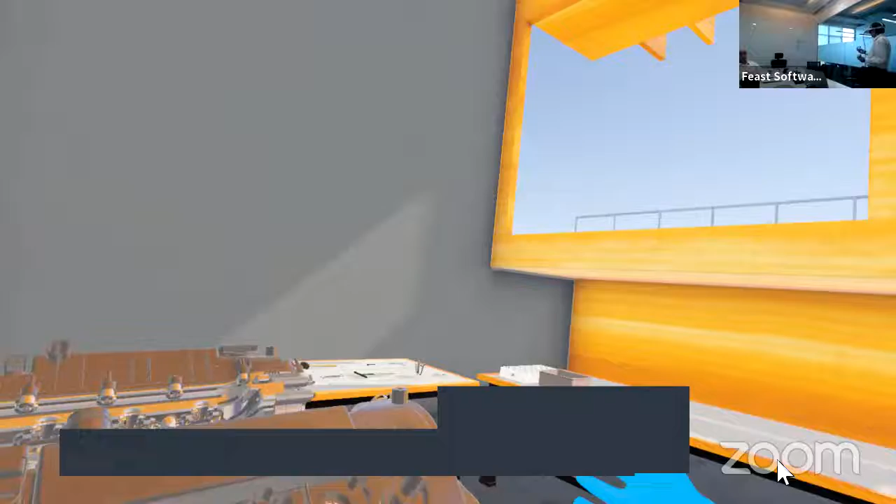Now there are two options for me. There are 8 different bolts available. I can remove them one by one, or I can click on the skip button, whereby all these bolts with a similar activity can be removed and those can be seen in a tray over there. So the repetitive activities which I don't want to do, I can just skip.

Now, next, I have removed the cover. I am using the scraper. Now this gasket, which is not reusable, I am putting it in a dustbin. Now remove the igniter coil on the other side, same process, so I will skip that. Now the main part, how to remove the pulley.

With the help of this joystick, I am adjusting the angle and moving forward or backward.

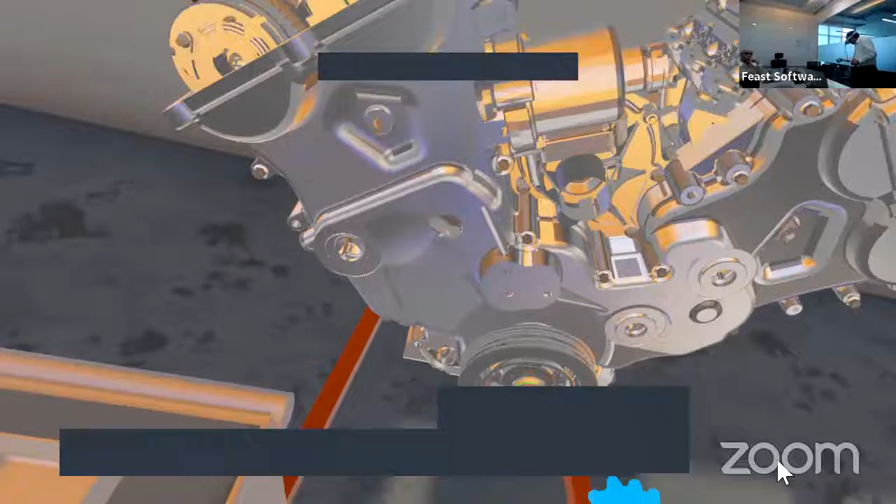Here I have to take the 12 mm socket, put it on a Tommy bar, place it at the pulley and rotate it for 5 times. After that, I can take out the main bolt.

Next step, I have to remove the washer and remove the main pulley bearing. To remove the bearing, I attach the T spanner, rotate it, take it out, and then remove the pulley.

Now the next step, remove the woodruff key that I have removed. Next step, the crankshaft oil seal, with the help of the crankshaft seal remover.

I have to attach another part over here. Put this assembly, pull it, so the bearing will come out. The crankshaft oil seal will come out, and I can put it on the table.

Similarly, next I have to dismantle the other components. I am putting the T spanner over here, which is rotating automatically. Okay, I can take out the bolt. For similar activity, I can skip.

Now I have to take out this cover. I have to use the mallet hammer, and at 3 locations I have to hammer it so that this cover will come out. Which are the 3 locations? That is the job of a trainer or tutor to tell the students.

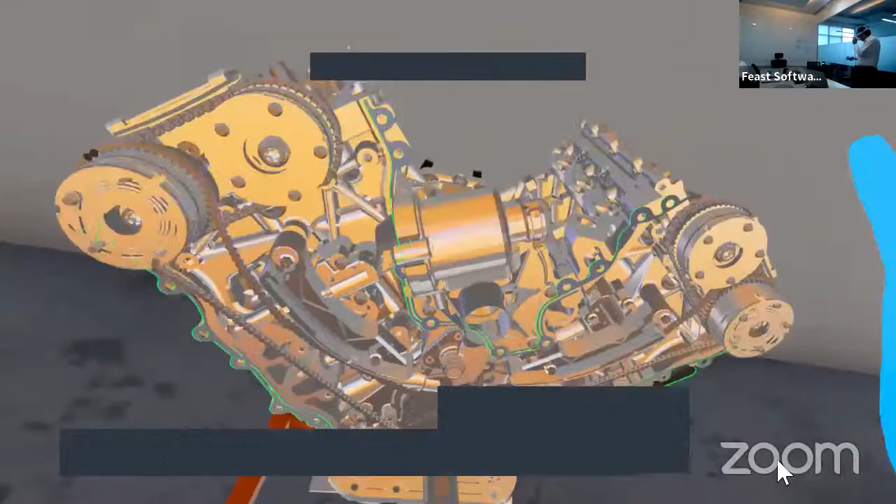Again, I have to remove the gasket.

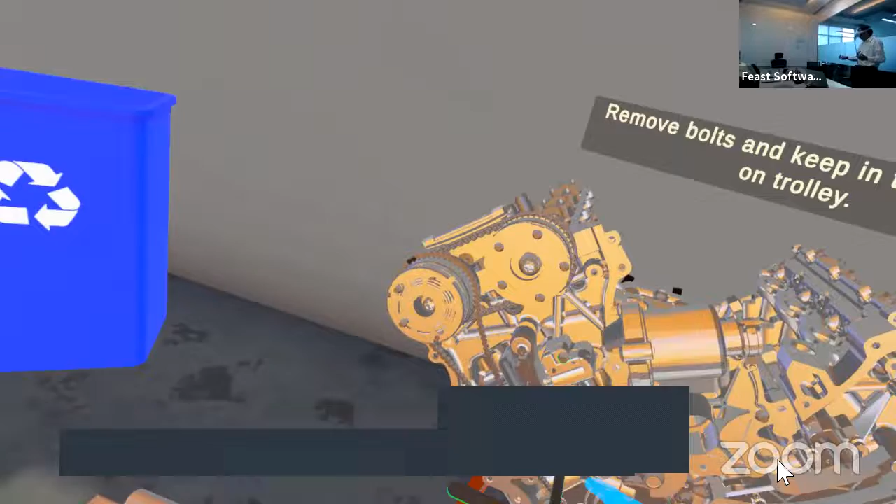Now I have to insert the pin, put on the spanner, rotate it, and take out the bolts.

So in front of you, I have done these few steps very quickly. Like this, 100 and more than 100 steps, around 110 steps, can be done very quickly with the help of this. So these were the various applications I was showing to all of you, along with the user feedback also.

So if you have any more questions, I will be happy to answer that. But as far as the content is concerned, this was it from my side for today's session. I will be happy to listen to your feedback or views also. What do you feel? How can it be implemented? And what are your ideas?